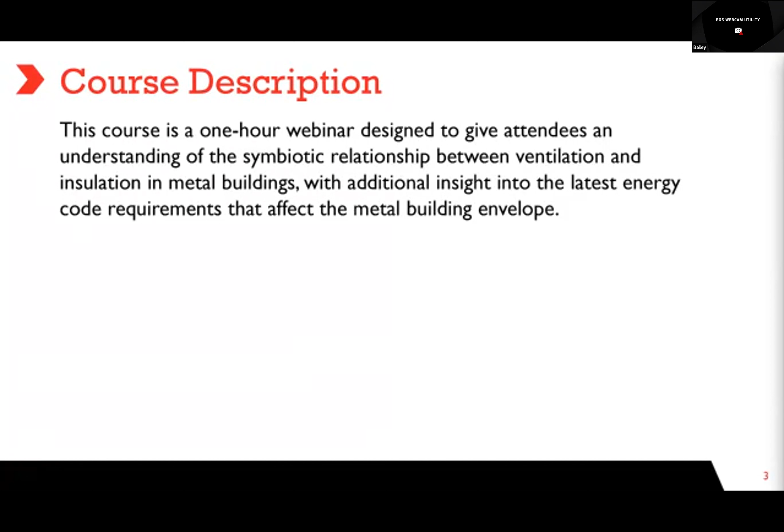This is going to be a one-hour webinar to give you guys a better understanding of the symbiotic relationship between ventilation and insulation for metal buildings. We're also going to incorporate some additional insight into the latest energy code requirements that affect the metal building envelope. So with that, we're going to go through the objectives that we want to cover today.

So we're going to talk about the science behind hygrothermal dynamics, and I'm really going to dumb this down. I'm going to make it very understandable to everyone: how it affects the building's longevity, calculating air exchanges, the factors to consider, and what to take into account when you're ordering. Ventilation helps a metal building's insulation performance. How does that affect it? And a history of the commercial energy code landscape, including the major governing councils that mandate today's codes. That's going to be a big topic Bill's covering.

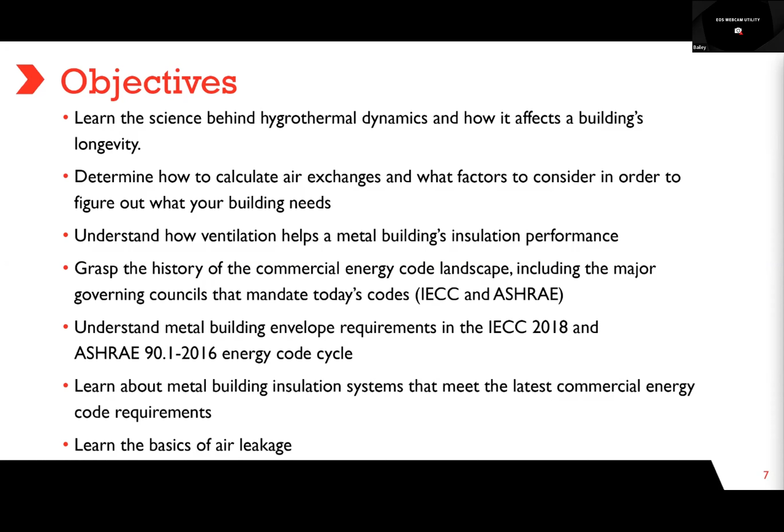And then understanding metal building envelope requirements for the IECC 2018 Energy Code cycle. So lastly, the metal building insulation systems that meet the latest commercial energy code requirements, and then we're going to cover the basics of air leakage of the building envelope.

So the question that is the impetus of this presentation is, why is ventilation an afterthought? Well, after reviewing the data and the results of a MBCA sub-meeting, we basically noticed a spike or increase of insurance claims with insulated buildings in regards to condensation damage with water vapor damage through the building envelope.

So in conjunction with that, we also noticed that there's a significant drop in building airflow designs and applications. And we arrived at the discovery that it appears that people within the industry think that you either ventilate a building or insulate, not both. And today I'm here to prove to you that both of those elements work together in tandem, a symbiotic relationship, right? That help with the building's longevity and the performance of it. So you're going to get the most bang for your buck incorporating these two systems together, okay?

So moving in, before we get into the meat and potatoes of this presentation, we're going to cover some basics, some fundamentals, so you have a baseline to get the rest of the presentation. First thing we're going to cover is hygrothermal dynamics. That's the big science of it.

All right, what is it? Relating to a combination of moisture and heat. Really simple. Hygro refers to water and thermal refers to heat. You can't manage a building's heat without also managing the moisture, okay? So if you increase the amount of insulation in a wall, you may also increase the risk of moisture and mold problems due to the dew point temperature within the cavity.

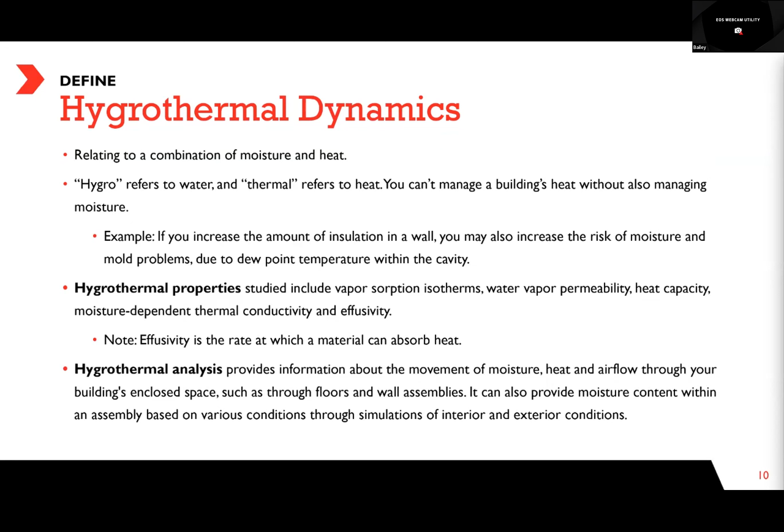The analysis side of it is the information about the movement of moisture. So heat and airflow through your building's enclosed space, such as through the floors, the walls, assemblies, the building envelope, can provide moisture content within an assembly based on various conditions through simulations of interior and exterior conditions. Okay, so that's your baseline for understanding hygrothermal dynamics, but we'll get into a little bit better understanding as we go forward.

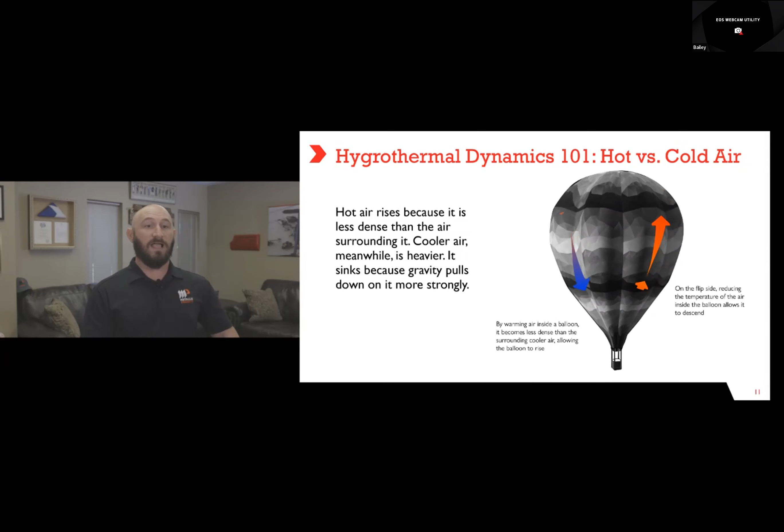So if I asked 10 people how does a hot air balloon work, I think 2 would get it right. So if you know coming into this presentation that hot air rises, you probably could get a job at SpaceX. Pat yourself on the back, all right? So let's cover some 101 here.

Hot air rises because it's less dense than the air surrounding it. Cooler air, meanwhile, is heavier. It sinks because gravity pulls down on it more strongly. By warming the air inside the balloon, it becomes less dense than the surrounding cooler air, allowing the balloon to rise, okay? That's the force that's pushing it up. On the flip side, reducing the temperature of the air inside the balloon allows it to descend. So we get that kind of basic concept of the science of hot and cold air, right?

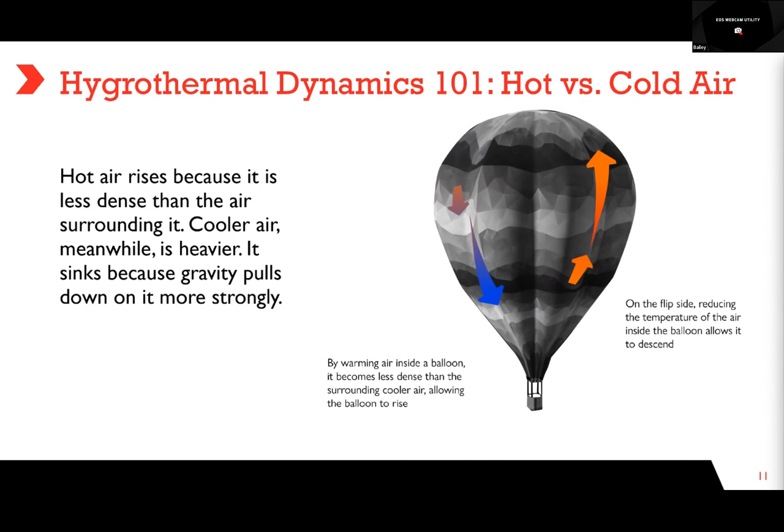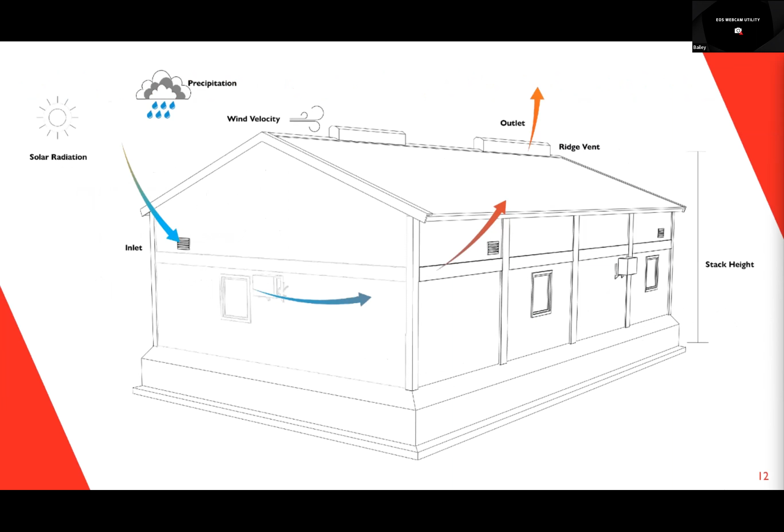So that's going to be the next part that flows into how does that principle work within a metal building. On this slide here, the intake element is a little bit too high up on the building. The lower the cooler air comes in, the better. Cool air will come in through the intakes of a building, whatever format that is, and will push the hot air up and out of the building.

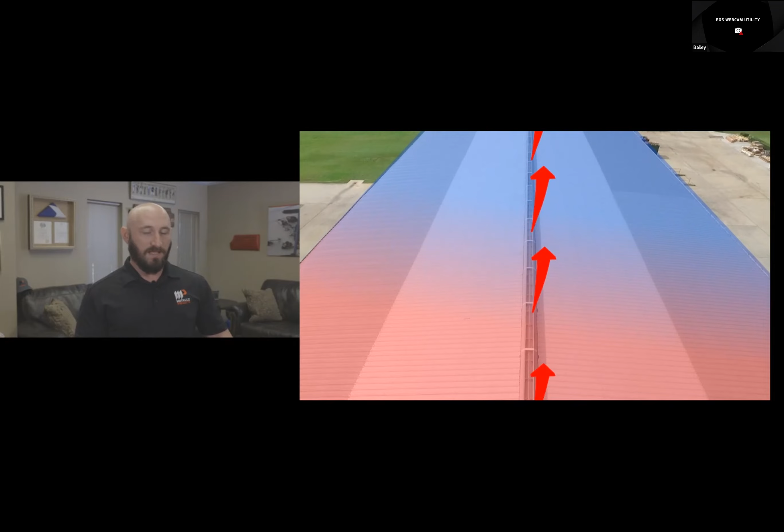Basically, that's airflow in itself. That's helping your building breathe. As you see right here, this is the hot air escaping the ridge line of the building. Cool air comes in through the bottom of the building, forcing the hot air up and out.

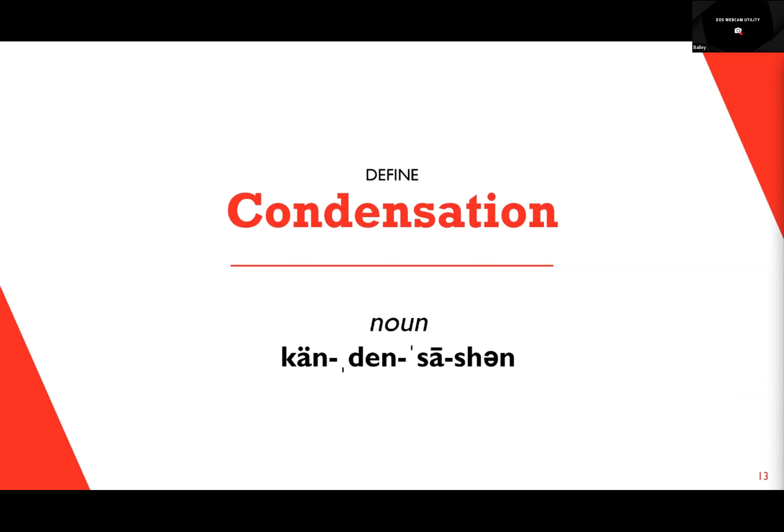So the problem here, condensation. How do we thwart that? How do we combat it? Let's talk about what it is first, okay? Again, we're working off basics. Next. So it's a change in the state of water from a gas or vapor form. We all learned this in 3rd grade science, right? Into a liquid form. Generally, it happens when vapor in warm air encounters a cool surface.

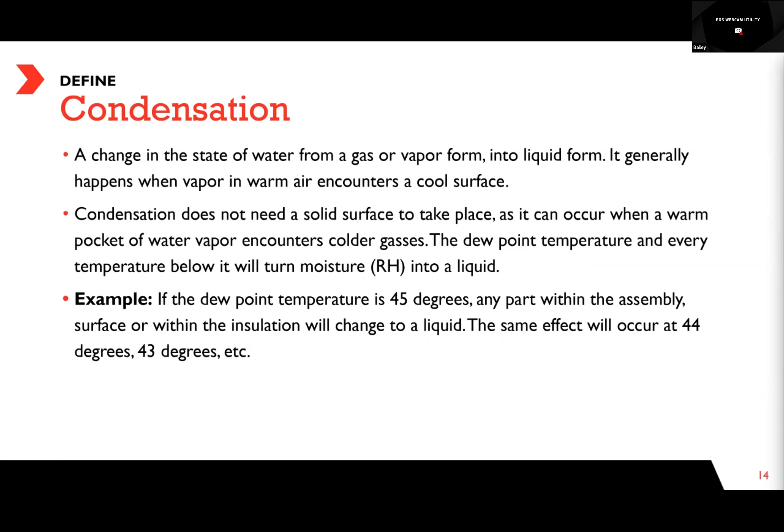Condensation does not need a solid surface to take place. It can occur when a warm pocket of water vapor encounters colder gases. So the dew point temperature and every temperature below it will turn moisture, which is your RH value, into a liquid. So for example here, the dew point temperature is 45 degrees. Any part within the assembly surface or within the insulation will change to a liquid. The same effect will occur at 44 degrees, 43 degrees, and so on.

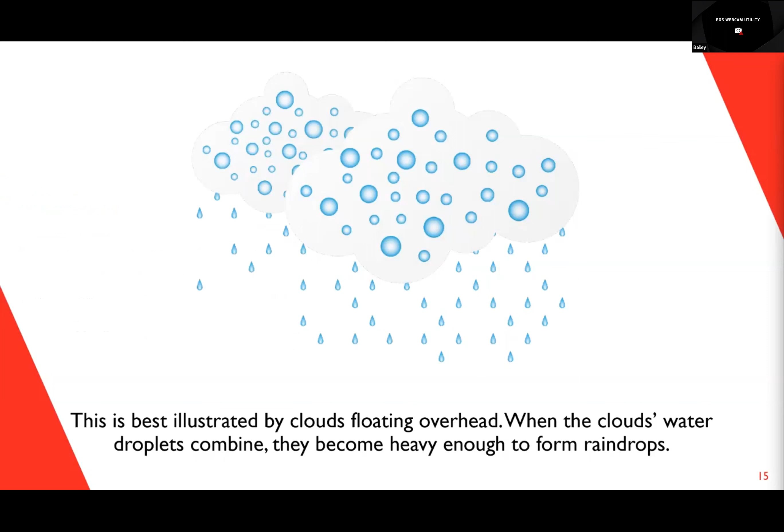So just like you see outside when you see clouds, that's one extreme meeting the other, and the result is condensation and/or the cloud, okay? And when enough of it happens, that's how the water droplets form, and then you got rain. I know I'm keeping this very basic and fundamental, but it's going to help you get a baseline to retain all this higher end knowledge here. So now let's talk about how the relationship between ventilation and insulation is in fact symbiotic, that it works in tandem. Next.

So in the past, the science associated with insulation and ventilation wasn't very well understood. As the amount of insulation increased, ventilation needs also need to increase. Insulation and ventilation are in balance. The relatively warm, moist air dissipates outside the building through the vents, but that's an important element there that I just glossed over. We'll touch on that again. They have to be within balance of each other. If the balance favors insulation, however, warm, moist air becomes cooler as it nears the roof, and then it can't easily escape if there's no exhaust element.

The air accumulates on the coldest surface, which is typically going to be your insulation, allowing mold to form, and if it's contaminated, the spaces provide a food source for other things you don't want in the building, like harmful bacteria, etc. Not only is this a potential health concern for people, but it also causes wood rot and degrades the insulation of the building.

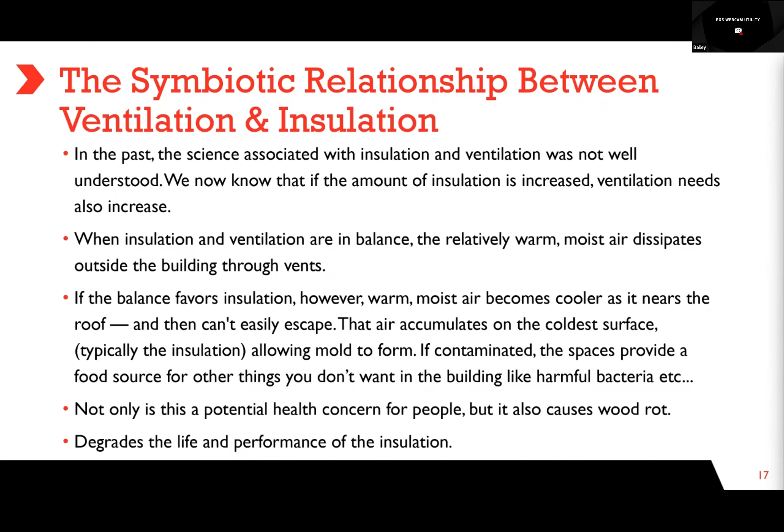Okay, so how do we make this happen? How do we fix this problem? What has to happen in order to mitigate this as much as possible, maybe it can't be eliminated, it's going to be through temperature regulation, right? So you don't have those two extremes meeting each other and creating the condensation problem. No matter how astonishing a building looks, it's a waste if the inside is uninhabitable.

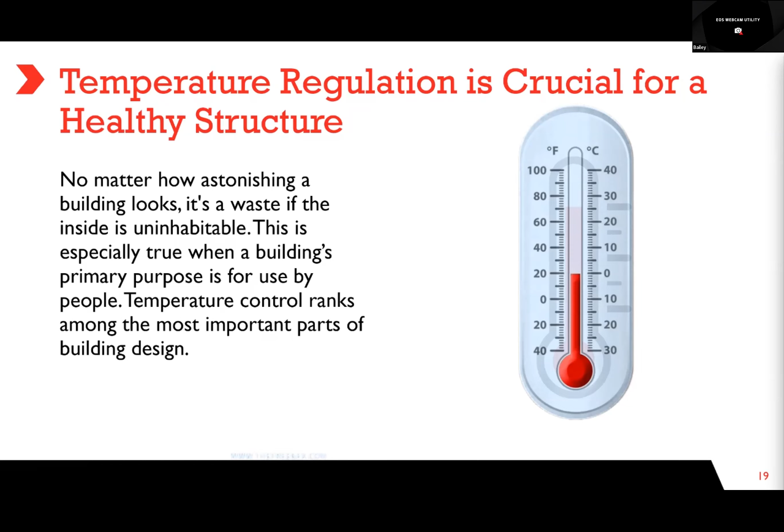So some of the pros of temperature regulation is especially true when the building's primary purpose is used for people. If there's manufacturing inside this building or it's a warehouse, temperature control ranks among the most important parts of a building design. It needs to be taken into account. Okay. So some things that you can expect: people working in uncomfortable hot and cold environments often behave in an unsafe manner, their ability to make decisions is compromised, and they perform manual tasks to a lesser degree.

Expansion of building materials. This leads to misaligned joints during construction, usually with interiors. Some materials are affected more than others, and we'll go into that more here at the end of the slide. For the safety concern, heat causes workers to be less careful. Oftentimes they will wear less protective PPE and become drowsy due to heat fatigue, and that's when accidents can occur. Okay, so the temperature of a building is actually closely related to safety.

And then about the materials, how that happens is when the temperature of steel structure rises, the atoms will vibrate. This process is called thermal agitation. That leads to an increase of interatomic distances and causes an expansion. So be thinking about screws in paneling right here. The constant expanding and contracting is going to affect the tensile strength. Go back to that one slide. The tensile strength and the yield strength and the modules of elasticity will decrease with increasing temperature.

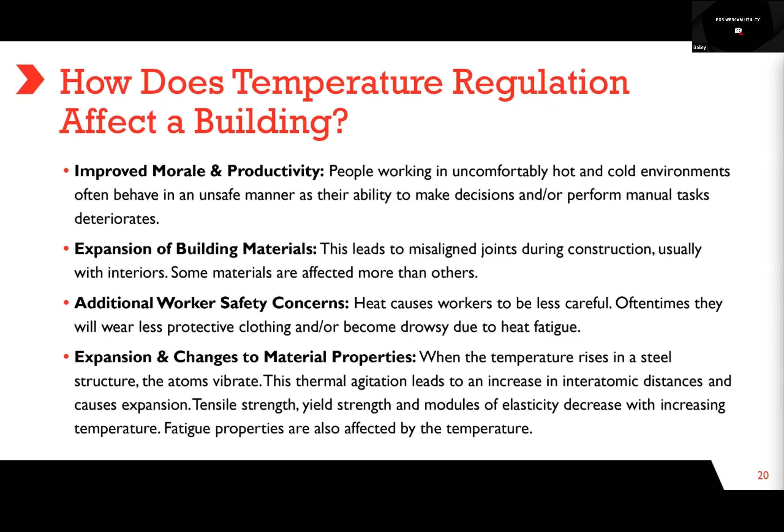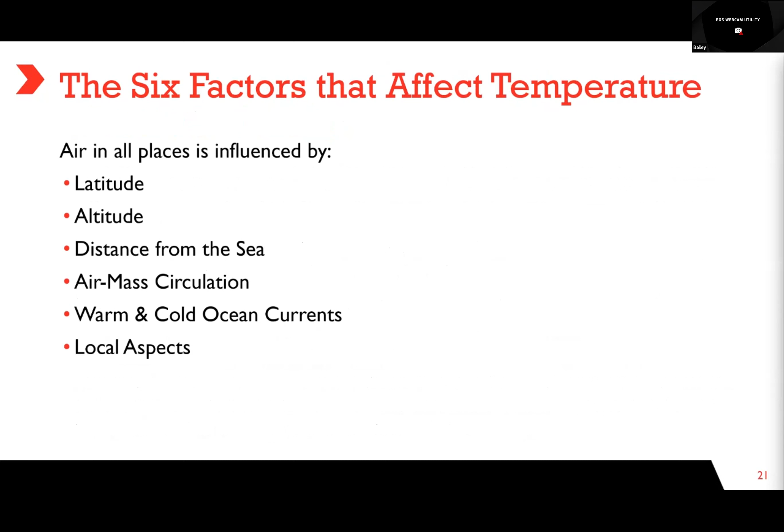So fatigue properties are also affected by the temperature, and that could come down to the color of the panels on the outside of the building. Next. So a couple factors here that you want to take into account that affect temperature are going to be your latitude, your altitude, your distance from the sea, your air mass circulation, warm and cold ocean currents, and then proprietary local aspects of the building site itself.

Okay. So some key things that you can use to help your building breathe, or ideas, is whenever you're designing or evaluating a pre-existing building, you want to have a climate responsive architecture. So you can do a site analysis, and there's lots of companies out there that do that. The layout of the building on the site and which end of the building is facing the sun,

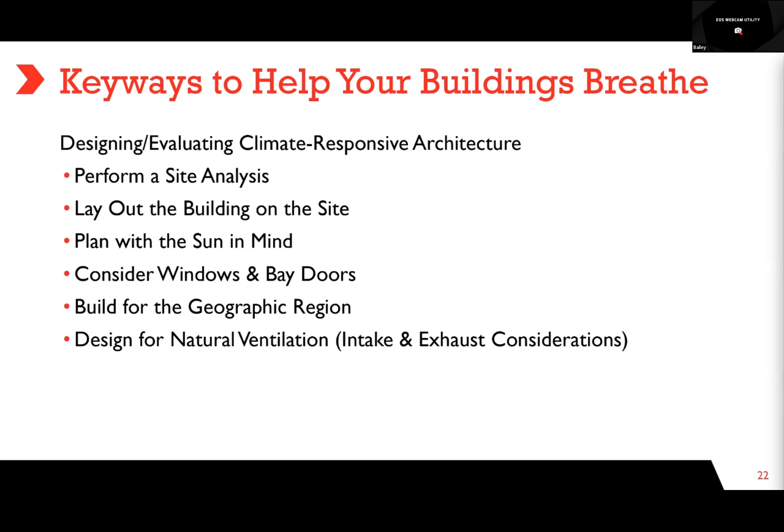you need to consider windows and bay doors, things that let heat in and airflow if they're open or not. That'll change the equation. Build for a geographical region. Are you in the mountains? Are you by the ocean? Are you in a mostly desert climate? And obviously designing for natural ventilation is comprised of two elements, which is your intake and exhaust. You obviously have to have both, and they need to be balanced between the two of them.

Okay. So now we're going to get into a little bit of the technical side of this, but I made it really simple. In order to get that temperature regulation that we talked about, we now need to get into airflow exchanges, next slide, and how they're going to be calculated. Now let me start by saying, I'm going to take some time on this slide. This is a little bit of an art and science to solve this problem. How we do that is it's first going to simply start with a conversation.

And the first question we need to ask is what level of air quality is needed and or desired? And this can be done prior to the inception of designing a building or after you already have a building and ventilation wasn't taken into account and you want to assess what you currently have to determine what you need to buy or what you need to change in order to get the end result that you want. This math and this process can be done both ways.

So once you figured out the air quality that you need, and that's going to be proprietary to what you're doing inside the building. Are you drying tobacco leaves? Is it a manufacturing site? Are you producing liquid chlorine? Things like that. All those things are going to be factors that come into play here when you're deciding what the ACH needs to be, which is your air changes per hour.

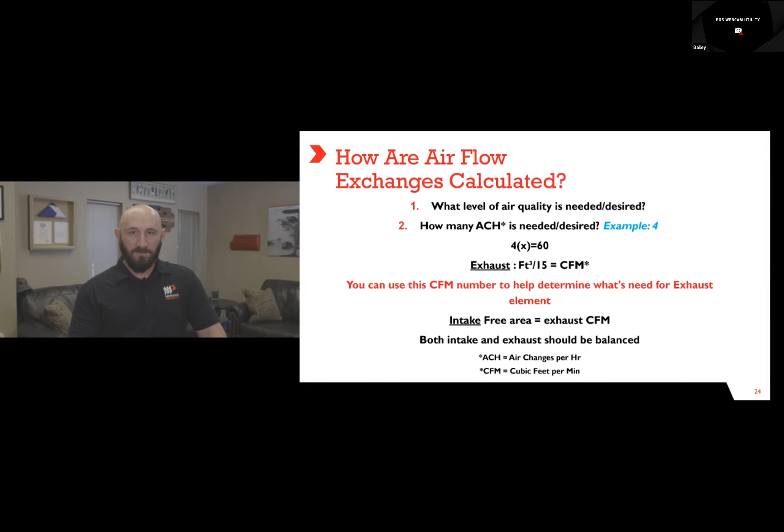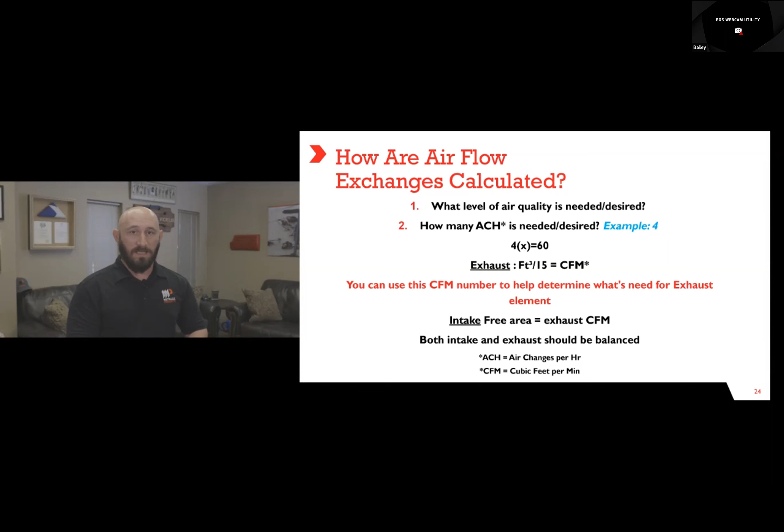So the intake free area, which is going to need to be at the bottom, at the base of the building, because that's where all the cool air is that's coming in. You take the intake free area, which basically assumes that you've deducted all of the obstructions. So if you have an opening with blades that open and close, you would have to subtract that obstruction in order to get the proper intake free area. That needs to basically equal and balance the exhaust CFM that you have for that building. So both intake and exhaust should be balanced.

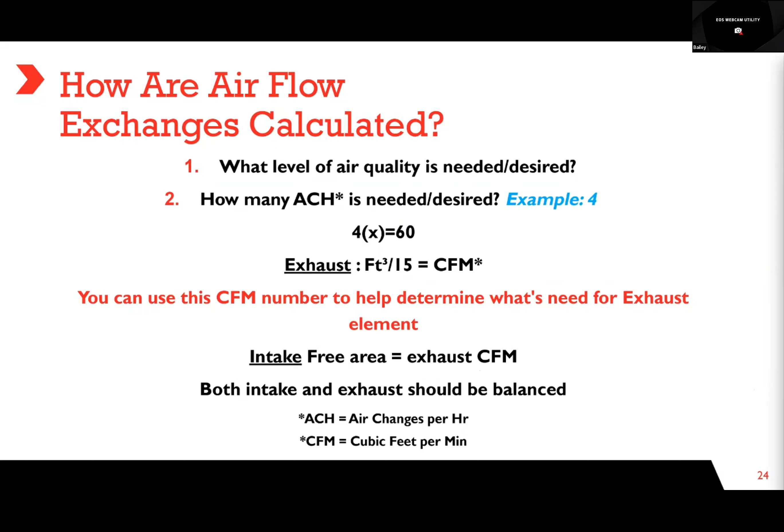Here's what happens if it's not. If you have too much intake and not enough exhaust, you're not going to get the ACH that you want. The building breathing won't be optimized, okay? And you basically are, in a sense, wasting money there. If you have the inverse of that, where you have more exhaust than you do intake, and those CFMs don't match, you're going to create a negative pressure element, okay? And that's what you don't want. That's 99% of the problems that we hear about, in regards to negative pressure. And you can't see it, and that's why it's hard to understand it.

So let me speak to negative pressure a little bit. It's a condition where air pressure is lower in one place in comparison to another. It can introduce contaminated air and air with high relative humidity in some climate zones. So for example, if you close part of the exhaust system on a 300-foot building on one side and it's open on the other side, that negative pressure element will create a cyclone effect, and you're not going to get the ACH that you want, and it will actually bring weather into the building. That's when people think that their exhaust elements are leaking, when really they're not. They're pulling rain into the building because they've ignored this principle of negative pressure.

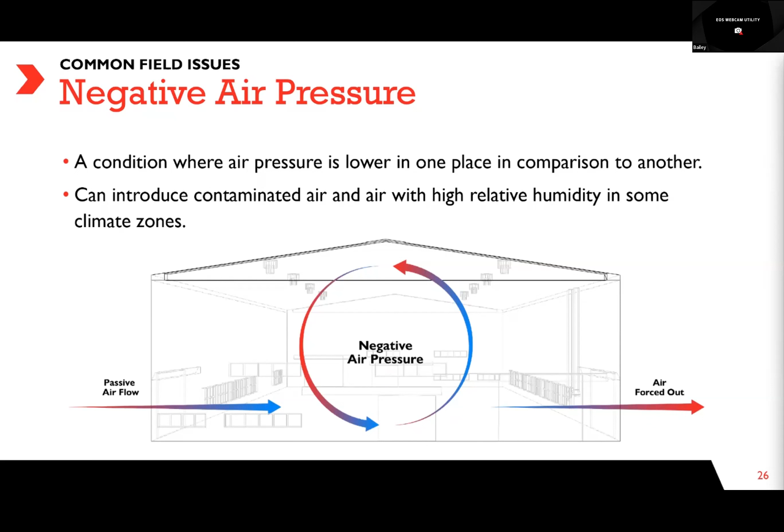So how you can thwart that is, make sure that the exhaust and intake CFM elements are balanced with each other. Okay, if they're operating as designed and the exhaust elements are doing what they're supposed to be doing, it's not going to allow leaves, rain, snow to come in through your exhaust element, because it's going to be venting. Okay, it's going to have to combat that, and it'll beat it out.

All right, next. So another thing that we see, these are just common misunderstandings and common field issues, is conflicting air management systems. And how this happens is, people that didn't get this webinar don't understand the principles of negative pressure, hygrothermodynamics, how air works within the building itself, and how a building's supposed to properly breathe, right?

So what we've seen in the past is huge fans right below the ridge line that are basically forcing air down to cool off workers. Well, if it's forcing air down, where's that air coming from? It's coming from the top of the ridge. And if you have an exhaust element above that, it's going to pull air through those vents, and that's why you're going to experience water coming in if it's raining. So ignoring these principles and not adjusting things or setting it up properly will cause problems with your building.

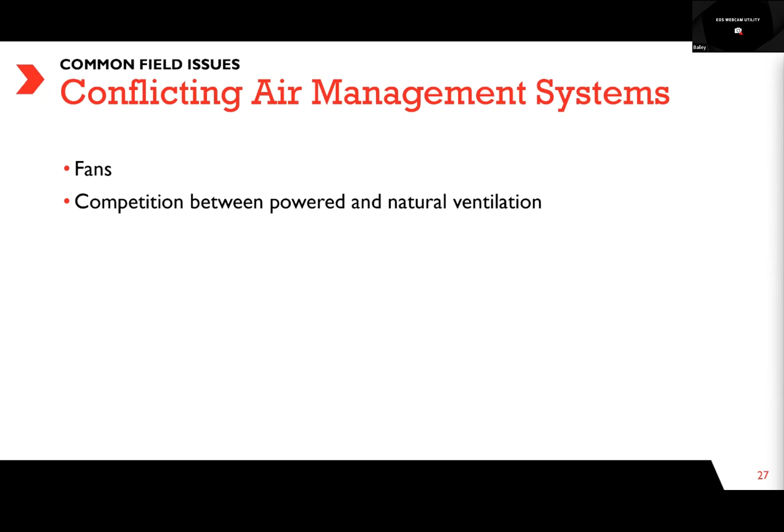Now, if you also have purge fans, exhaust fans that are pulling air that's inside the building and forcing it out, and you don't have enough intake to support that, that'll also cause you some problems. I don't know if some of you have gone to a job site where there's a completed building and you literally can't get the door open because it's being sucked in. You have to put your foot up on the frame just to open the door. That's negative pressure. That's the element that's going to be in place when you see that.

So those are things that I wanted to bring to you guys to have a greater level of understanding of the science of airflow within a building and what affects it, and how this airflow can help regulate the temperature within a building so that your insulation is not compromised. It maintains its integrity, it has a longer life, and it's not going to get damaged. So with that, we're going to be moving on to more insulation considerations for metal buildings. We have Beals with Therm-All.

For people that don't know me, Bill Beals with Therm-All. Been doing a lot of code presentations over the years as they've evolved, specifically for our industry, which is metal buildings. And a lot of this is kind of repeat stuff because some things in the code change every 3 years, some don't. So I'm going to kind of get us through the process of how this all works. A lot of people know ASHRAE as a standard, which is exactly what it is. It's the minimum standard of energy efficiency that's done in a 3-year cycle, just like the IECC.

IECC is the energy code portion of the ICC, which is the International Code Council that has plumbing, fire, mechanicals, etc. So we focused more on the IECC and the ASHRAE 90.1 standard as far as envelopes go in our industry. The 3-year lag is between both of them, but ASHRAE typically will publish first, and IECC will do a publication, which is actually the code. And a lot of the reference data comes from ASHRAE, specifically to metal buildings, because the thermal performances and U values that we'll get into all come from submittal data that was done at ASHRAE. So there actually is a reference from IECC in part to the assemblies and the performance testings.

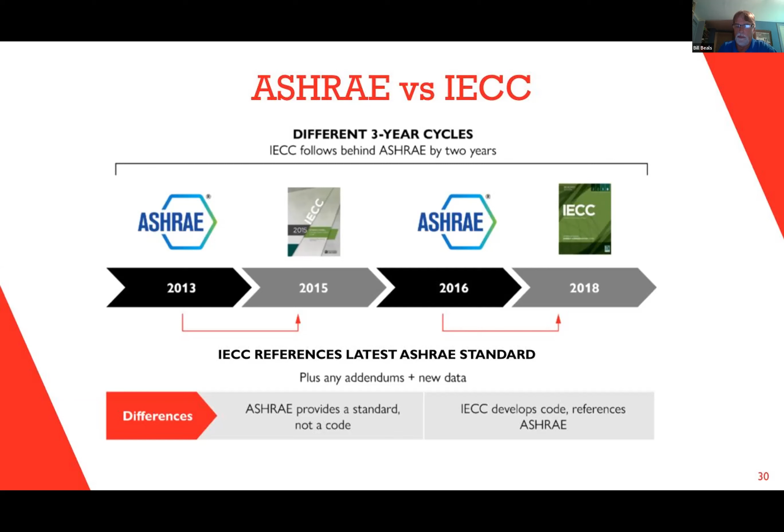So again, ASHRAE typically is not a code, it's just a minimum standard of energy efficiency. However, some states do adopt the ASHRAE standard as their energy code, which is perfectly fine, but IECC is more of a publication that has the written language around a code more than just a standard and all the methodologies that are published in ASHRAE and how the programs actually work.

So there's a couple of ways: the prescriptive approach, which is just that. We call it the cookbook approach, which all IECC codes and all ASHRAE standards have a table, and they'll publish U values for metal building roof, metal building walls, and all your fenestration. So it's pretty easy to just look at the table and say, I need to meet this, this, and this. And that's a prescriptive approach. And a lot of people think that's what they have to do, but you can actually do 3 choices. There's trade-off method, which is usually achieved through ComCheck. And there's whole building modeling, which is more of an open studio program that takes into account the whole building as it relates to its climate zone. So we mostly do the trade-off through ComCheck.

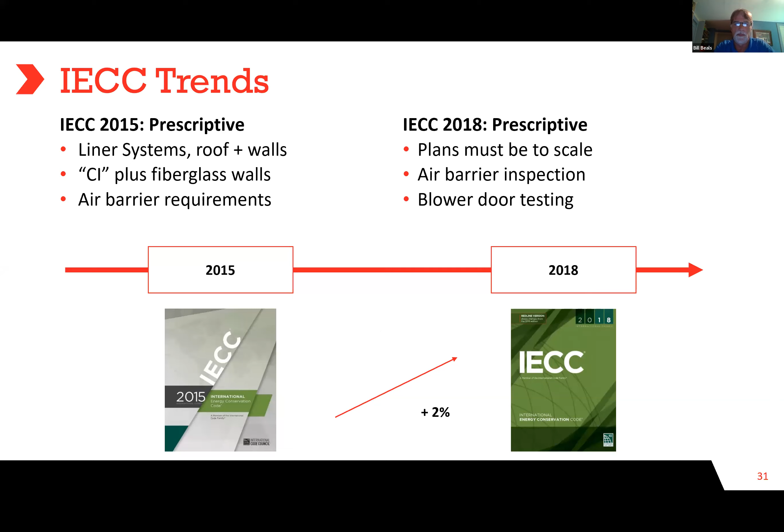So how ASHRAE is influenced through our industry is the Metal Building Manufacturers Association, and I'll say this now while it's there. Sam alluded to hygrothermal analysis. We actually have done quite a bit of that through the MBMA, and if it's not published yet, it soon will be. And it's a simulation: indoor temperature, relative humidity, outdoor temperatures, relative humidities, the fiberglass and board insulation assemblies, and the vapor barrier perm rating, and how the moisture in certain times of year through that simulation will migrate in and out of the cavities. And right now we're, I believe, on our final 0.02 perm, and what the relationship of moisture is in these cavities based on that.

And that comes into play in a part of the code called the weather resistive barriers, which is a part of the IBC. It's not the energy side, but I run into it quite a bit. And you have to have a weather resistive barrier to stop moisture from migrating into the cavity. And there's no exemption for metal building walls. The only exemption is, I believe it's an ASTM E331, which the metal building manufacturers can do with their panel. But it's a sealed panel and it is tested, and most pass, but you have to use all of what was tested under that E331 in that wall to be in compliance. The only other option, an exception to the rule, is hygrothermal analysis, which would prove that that moisture in that wall cavity will be introduced and mitigate itself out under normal conditions.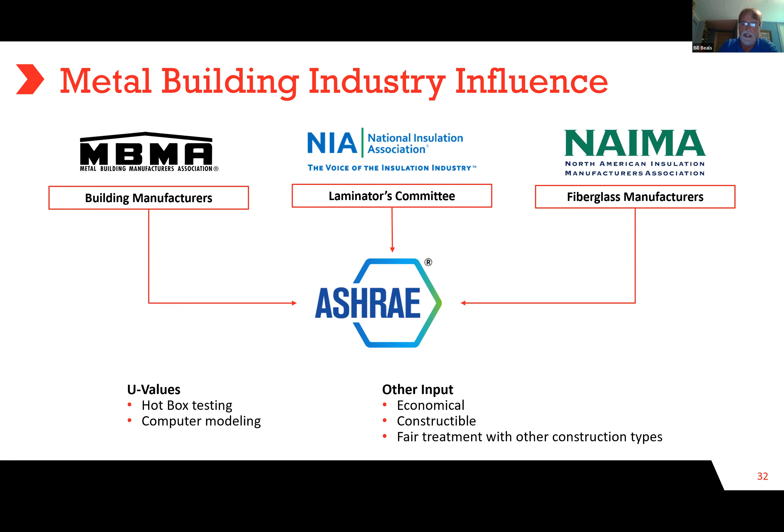But in our industry, specific to metal buildings, these are the 3 ways we do it: the hot box testing, computer modeling, and is it constructible, fair treatment with other construction types. So it's pretty basic in what we do. And then, believe it or not, people think insulation, they think R value, but really a U value is more important than an R value. It's the actual performance of an assembly over the performance of a material.

So when you build a building and you put R19 in the roof and you squish it, it comes down to the old U value of 0.065. That's a tested in place R of 15.4. That's actually gone down over time. So as an owner or as a mechanical designer, and as ventilation goes, you really want to know the overall performance of that assembly. So that's why U value of a roof and U value of a wall is the real performance that you need to pay attention to.

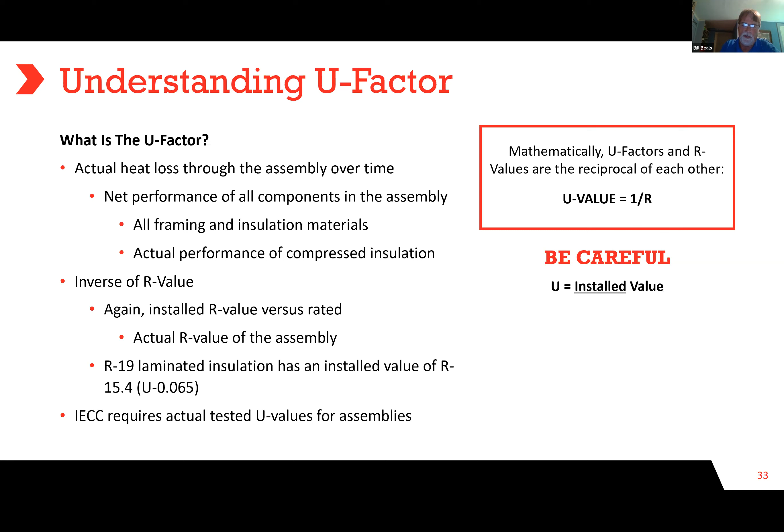And I got some tables coming up. The R value method and the U value methods are two separate tables, but they're kind of the same thing, and I'll talk about that in a minute. So there's other parts of the code and the ASHRAE standards that come into play. The alternate materials approach paragraph has expanded quite a bit beyond what it used to be. What this means is you have all kinds of buildings, fabric buildings, construction types that are not part of the code itself.

You have brick and mortar, all your construction types that have been around for 100 years, but there's always other types of construction where you basically have no test data to say that the envelope meets the code. So it's more what I call intent: you take that construction type, design it with insulation and materials, and submit it to the code official as meeting the intent, but there's no U value testing to show that.

And that code official either accepts that or he has to write a letter stating the reason why the alternative is not approved. I've yet to see one not approved, but I do run into these types of constructions. That paragraph used to be just one sentence saying you're meeting the intent of the code by doing this, so it's got a little more language there. The other is the U factor alternative. Every IECC code has had it and the ASHRAE standard has it.

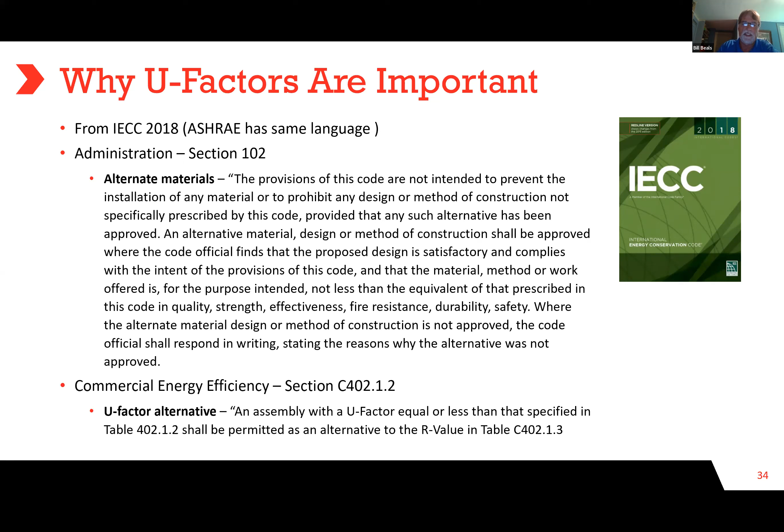The simplest example I can use is a metal building wall under most IECC codes, say R13 fiberglass with R13 CI, continuous insulation. That combination, under the prescriptive path, was thought to be the only way to meet the code. And it's not. There's a U factor alternative, which says if you have a system tested per ASTM C1363 hot box or simulated through thermal analysis based on hot box testing, and you can back up the data that your U value is equal to or better than that prescribed in the R value table, then you're allowed to use that. But you have to have the test data to show compliance with the U value.

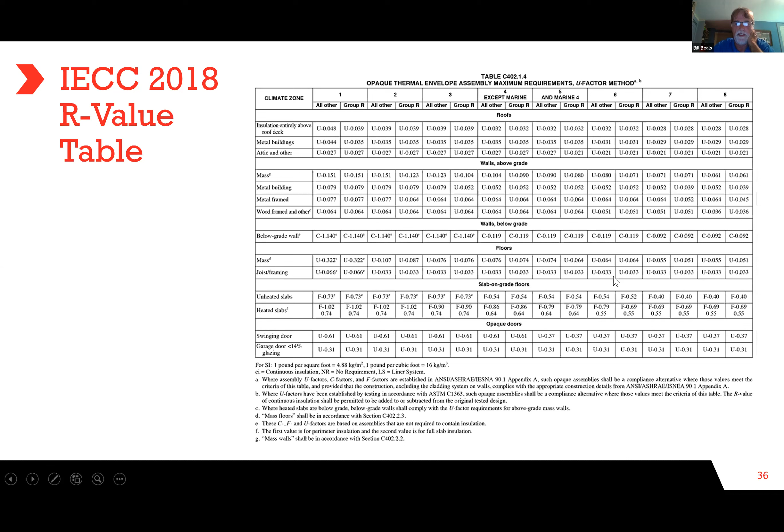So there's lots of things in the code that I've read for many, many years and try to get better understandings on. And this is one of the ones where a lot of architects just don't seem to understand what these methods are and why we're allowed to use them, but they're there.

So heat and ventilation and IECC. So I'll start with heat. As far as IECC goes, you have an option under the IECC actually to use the ASHRAE standard as a compliance path, as opposed to the IECC code. And it's, I believe, C401.2, which is called applications. And it said these commercial buildings shall meet one of the following. And the first choice is the ASHRAE standard.

So as a designer, if you say, all right, I'm going out of IECC and I'm going to use the ASHRAE standard, you have to use the ASHRAE standard two years prior in publication. So I-18 code, any state using I-18, you'd have to use the ASHRAE 2016 standard as a compliance path as opposed to I-18. And there's a few reasons for that. There's a lot more calculation procedures that are outlined in Appendix A in ASHRAE specifically for metal buildings.

And there's also what we call semi-heated space. So IECC does not have a semi-heated space specifically. They have low energy buildings, which is on the very low end of semi-heated space. And the heating requirements are below 3.4 BTUs per hour, and then there's a lighting requirement. So if you're under that in IECC, you're actually exempt. But ASHRAE has what's called semi-heated space.

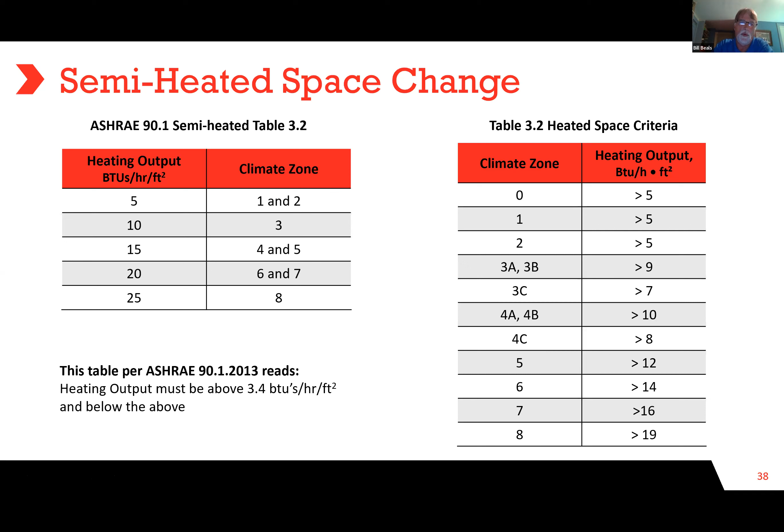And it does affect the northern climates, I would say, the most, because I'm in Maine and a lot of ours are climate zones 4, 5, somewhat 6. When you go to this semi-heated space, or if you try to build a building heated to that and you have a wet sprinkler system, it's more than likely going to freeze. Whereas the old BTU numbers were just at the point where you could actually get away with semi-heated space.

So air barriers, I got some slides that we jump around on here, but make no mistake, as the codes have evolved, the language within the air barrier requirements has expanded quite a bit, because thermally we're kind of maxed out for metal buildings. And I think most other construction types, when you look at the U-values and the systems of fiberglass, board, whatever you want to use, we've kind of maxed out where we are as far as envelope goes.

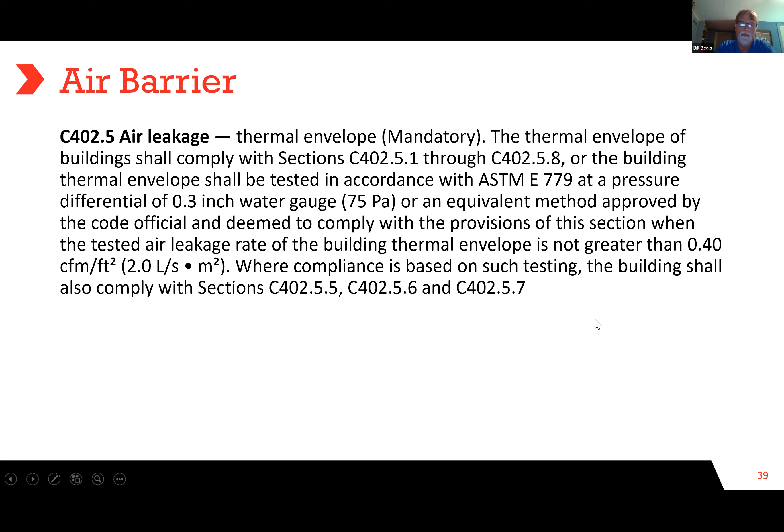So the next thing was the air leakage, and it becomes mandatory to have an air barrier within the thermal envelope. And in some cases, whole building testing is required as per ASTM E779, and you have certain allowable leakage rates. And I'll get into this a little bit more, but there's a lot more language than just the testing of a building, and there are other choices.

So the language used to be a couple of paragraphs. Now it's a continuous air barrier. The entire envelope shall be designed and constructed with a continuous air barrier. Exceptions are semi-heated spaces, which we talked about, and single-wythe concrete buildings in climate zone 2B, which for some reason has always been in there. Each component of the envelope has to be clearly identified or otherwise noted on the construction documents.

The joints, intersections, penetrations, and basically all components must be noted. Some states are a little different, but up in New England here, we have some pretty good code officials that look at all this. So when you go to submit your drawings for a building permit, your drawings typically have to show all of this, as you have to designate the air barrier and show on the drawings how all these different construction types interface. And whether you're blower door testing the building or not, these are still mandatory requirements.

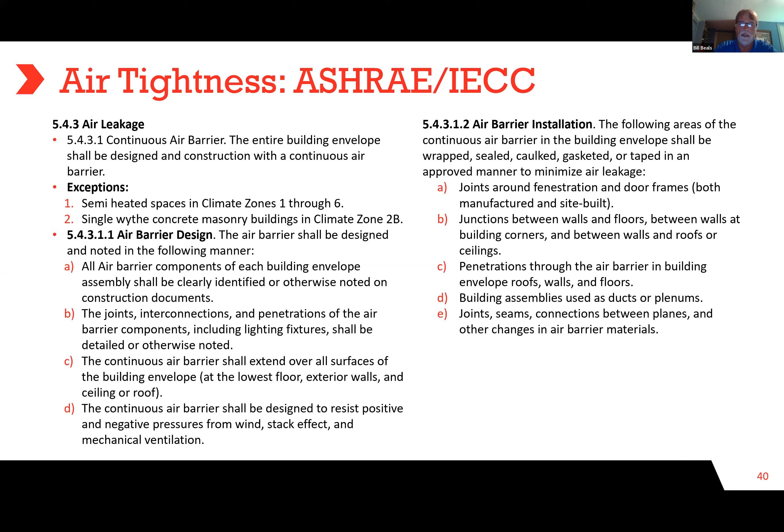And the ComCheck reports are another part of that as far as the energy side goes. So I will tell you that this air barrier thing is not going to go away, and it all will circle back to the ventilation part, which Sam talked about, because now that we've talked about the envelope and the insulation and the air tightness, the air quality within a building comes into question. It's like, how are these buildings going to breathe? We'll get to that when we get to those slides.

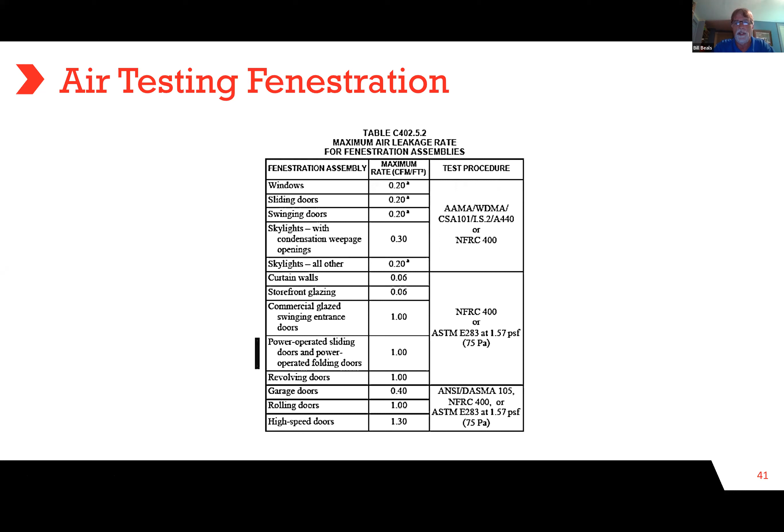When it comes to air barriers within a building, the designer has three choices. He can choose materials option, assemblies option, or whole building. And if you choose whole building, that means the whole building is going to be blower door tested. And if it fails, you can't go back. You own it until it passes. And there's certain numbers under ASHRAE that you're allowed to get. You don't have to be at the 0.4. If you make corrections and you only get to a certain number, you're actually in compliance.

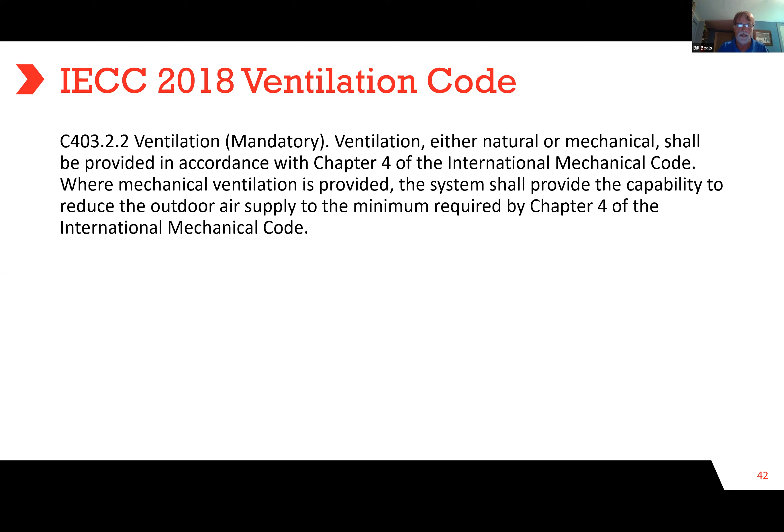So the other part of the code that is mandatory is called ventilation, and it's either natural or mechanical. I know Sam talked about natural as a big part of it, and in many climate zones, that's a great option. The mechanical side is a little more sophisticated. I'm not going to get into it other than to say Chapter 4 of the International Mechanical Code needs to be understood as you go into these buildings that are energy efficient, airtight, and we do not want moisture in the assemblies.

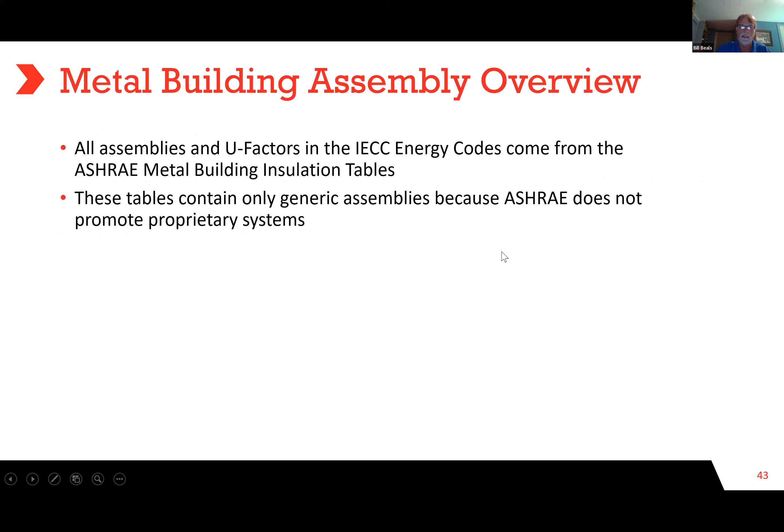These positive and negative pressures that Sam talked about play a huge role in the moisture content within these assemblies. It's not just moisture passing through the vapor barrier, it's a negative pressure pulling moist air from outside the building into the building, and that's usually contaminated moisture and can over time become a huge problem if not properly vented, changing the dynamic of how the moisture got in there.

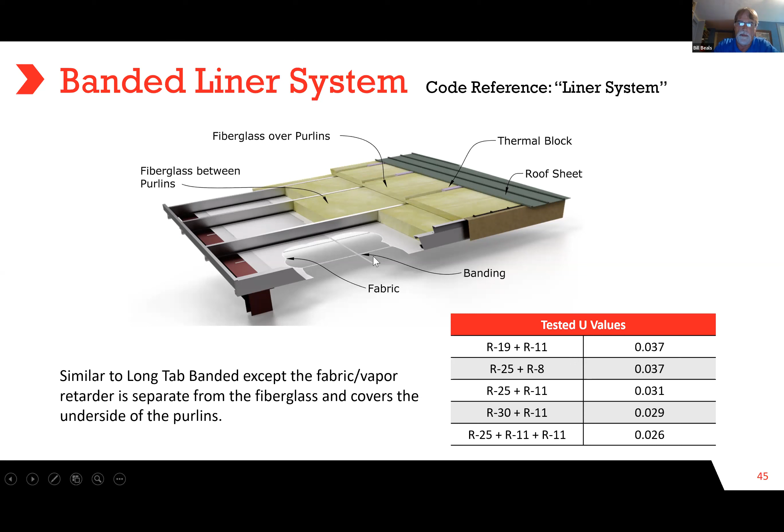So your thermal performance is less, because any type of moisture as a liquid becomes a conductor of heat. Now, these buildings do cycle in and out of some moisture content, as do all other construction types. But again, you look at air tightness, thermal U values, the performance of all these systems, you start running into: how do I make this building operate the best it can be? And that's with proper ventilation, zero pressures, no positive, no negative.

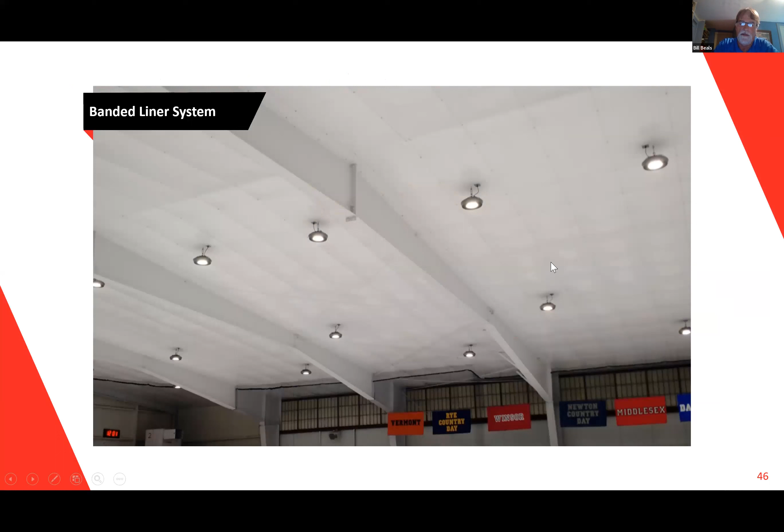These systems have been on the market quite a while. They perform and do a very good job in all construction types. This is an ice rink, and swimming pools, I'll tell you right now, could be a problem. But again, it comes back to what's this building going to be used for?

And I heard Sam mention a couple, and I like to say swimming pools, because if somebody calls, say, hey, I'm building a swimming pool, what should I do? It's like you're calling the wrong person, because I'm not going to tell you to use a liner system. I'm not going to tell you use anything, because I've seen so many failures. Granite cutting buildings, all these need to be addressed by the proper engineering company and architects that can design and vent these buildings to perform the way they're supposed to perform.

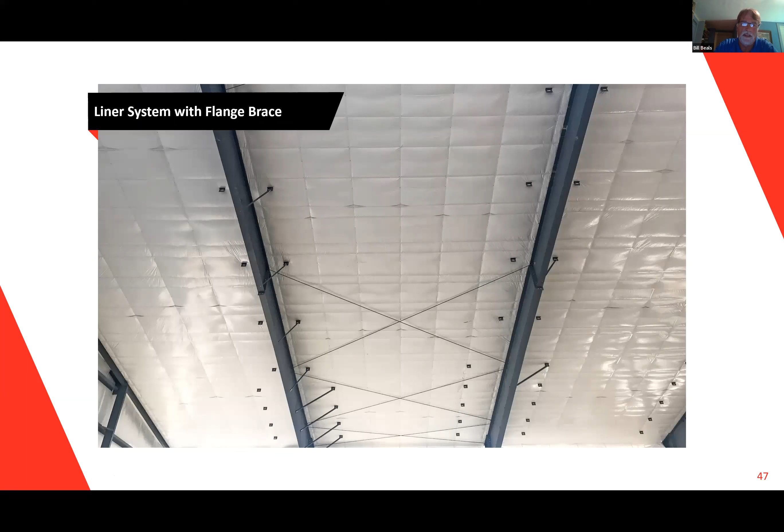We have a lot of interruptions, so to speak, in the vapor barrier when we cover the purlins and go to liner systems. This shows most metal building manufacturers have a great flange brace detail now, which is either a knife plate or a double L that minimizes the penetration in the vapor barriers, which need to be 100% intact for it to perform. I've got a slide coming up that'll show you the difference of a vapor barrier with a 1-inch hole and a vapor barrier with nothing other than diffusion, which is what happens when gas as a water vapor goes through a vapor barrier.

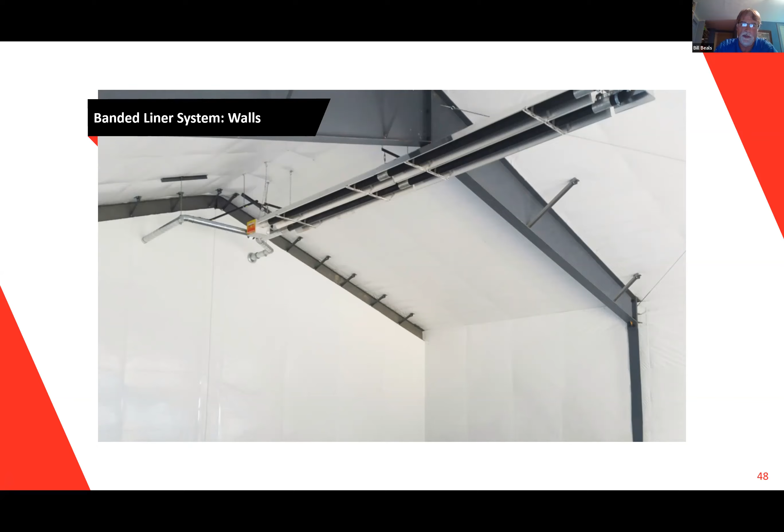The walls by code, this is a perfect example of where we are at with metal buildings and fiberglass. The roof is a liner system, the wall is a liner system. The heating systems, as long as they're vented, can perform quite well. Radiant heat is another one that we see a lot of, but I'll tell you this, if you got radiant heat, don't park your dump truck in there full of snow in the winter while it melts, because then you're going to call me and wonder why there's ice on your windows.

Air leakage and infiltration. So I'll get into that a little bit. Air leakage is sometimes called infiltration, which is the unintentional or accidental introduction of outside air. Humid climates will have warm, moist air moving into the building envelope through leakage around passage doors, and in the winters can result in moisture in the envelope. Infiltration is caused by wind, stack effect, and mechanical equipment. I've got some slides that will explain exactly what that all means.

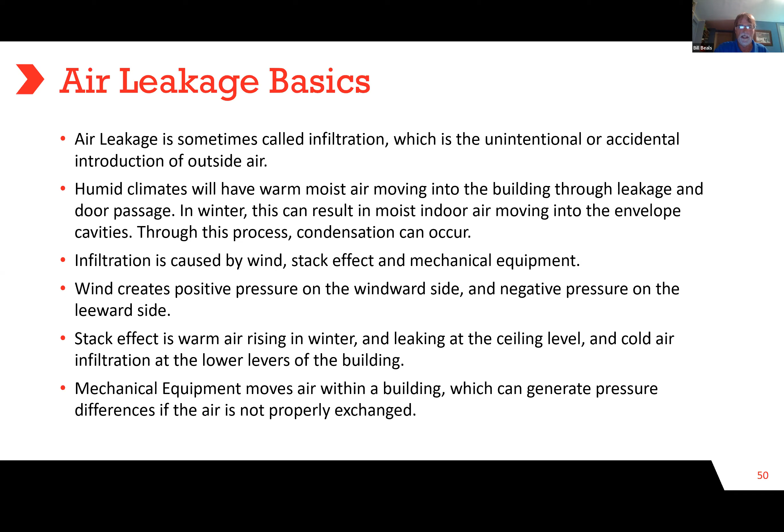Wind creates positive pressure on the windward side, negative pressure on the leeward side, and how that reacts to either pushing outside air in or sucking inside air out. And this is why air leakage is very important on how a building is going to perform sitting in an industrial park in a real world situation. So the mechanical equipment, it all moves air. So this is a real building. You'll have internal positive pressure acting in concert with external forces.

So when the wind goes up over a building, it creates what's called uplift. And it's suction pressure on the roof that lifts air within the cavity at some point out. So any moisture, sometimes it does get in your metal building envelope. There's some days it will exhaust itself just by the uplift pressure of the wind. But in the winter, all of your heat that you're trying to store, especially in Maine, you don't want that. So that's why this air barrier and air tightness has become a huge part of energy efficiency for all buildings.

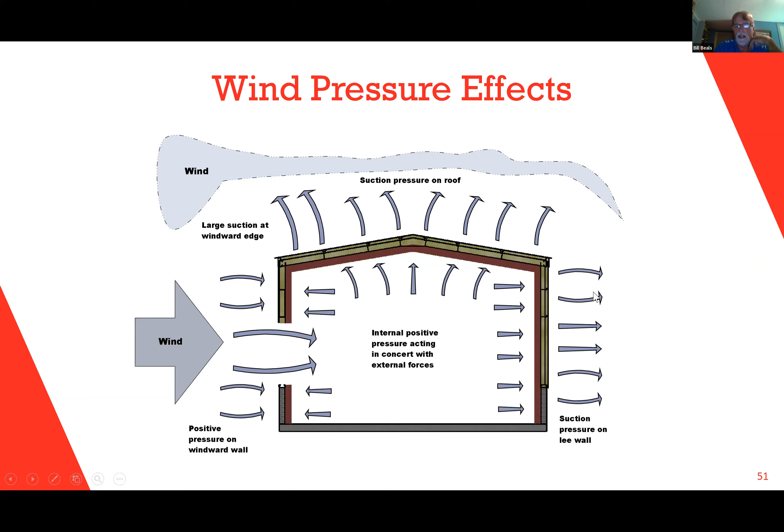And then we talked about the wind. On the windward side, positive pressure. The leeward side is going to have the negative pressure. So you look at a metal building wall, we have that fully insulated with fiberglass here. And the panels themselves, they're lapped, but they're typically not sealed. So it's just a lapped panel. And it will start pulling the heat out of that cavity that you've collected during the day, just based on how Mother Nature acts in a building that's in the real world.

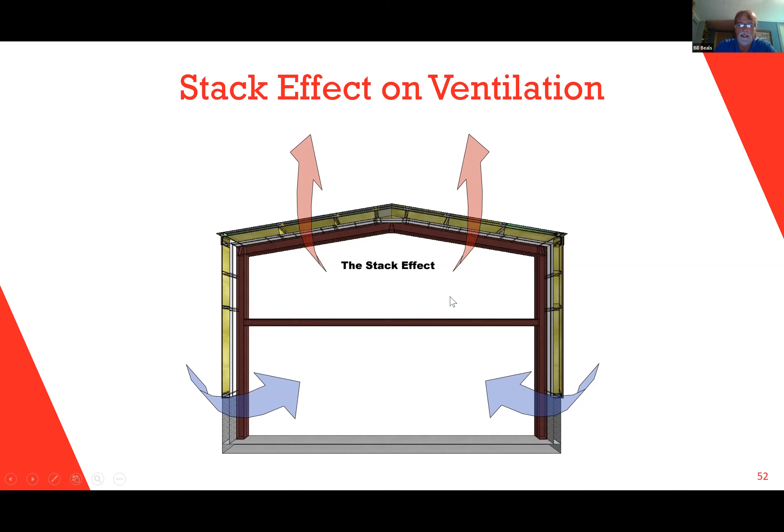Stack effect is pretty simple. Warm air in the winter rises, cold air is introduced typically through air leakage down around the bottom. So we take a new building built to code with an air barrier in there. We minimize that air that's coming in at the bottom, and then stack effect, again, what happens? You're going to start building a pressure cooker. So ventilation is everything on how these buildings need to and should operate.

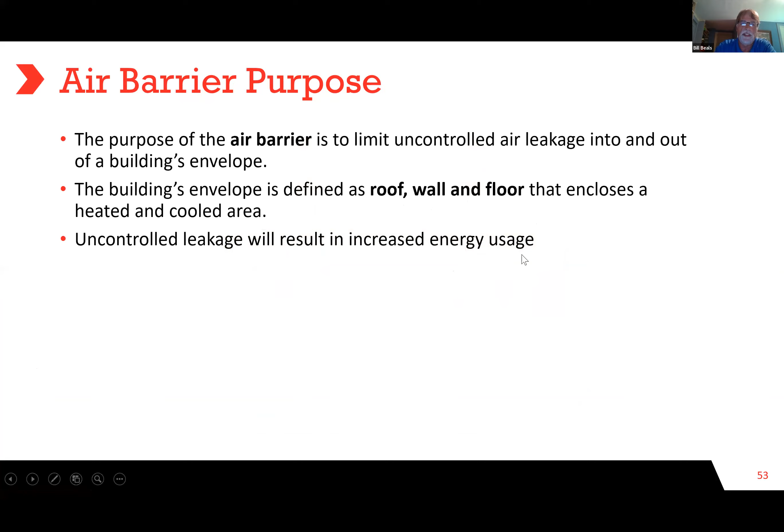All right, so we talked a lot about the air barrier and the purposes, and uncontrolled leakage will result in increased energy use, and it all has to do with devil's in the details. Everything has to be detailed out. So I've got some pictures here that show some air barrier that we do for submission for code officials, and this would be a perfect example of a liner system.

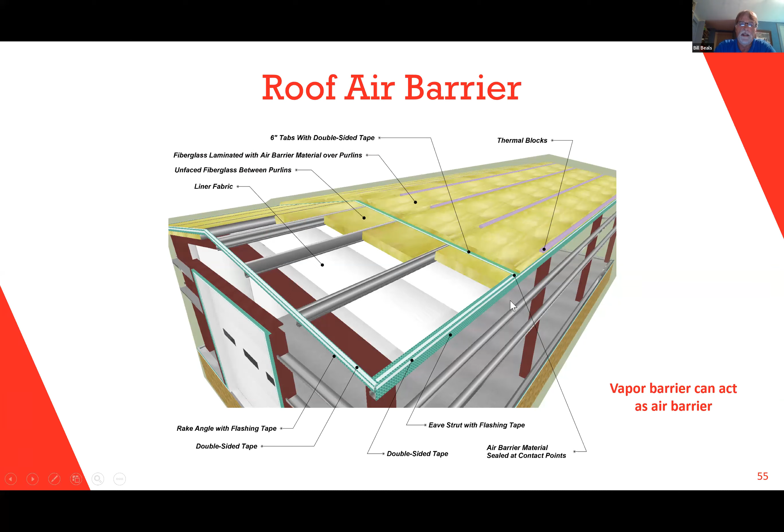The white vapor barrier can be used as the air barrier, and that would have to be detailed out and shown on the drawings. We have other options where we can put air barriers within the assembly, and that would have to be detailed out and done exactly how this is done. We also do all the walls the same way. Again, the air barrier would be detailed and shown. All your transitions, all your floor to wall would have to be done.

So technically, the way the code is written right now, this is what has to be submitted as a drawing for your air barrier design to meet the letter of the law. Whether or not you're going to blower door test it is irrelevant at this point, because it's still there and has to be done.

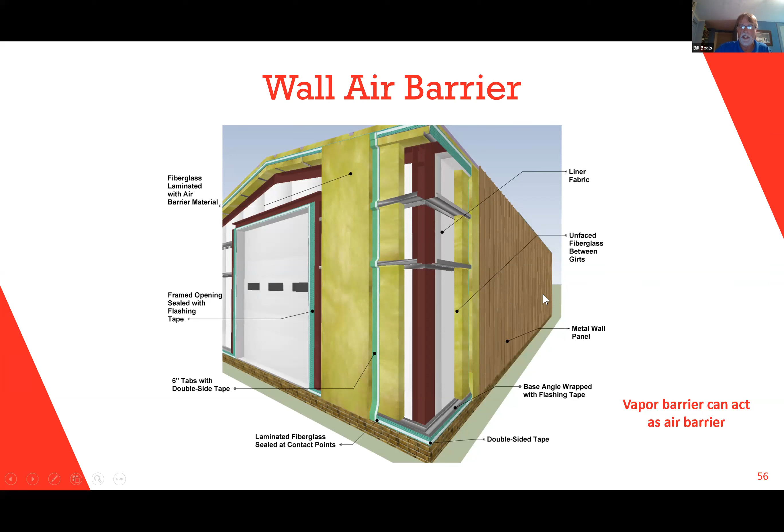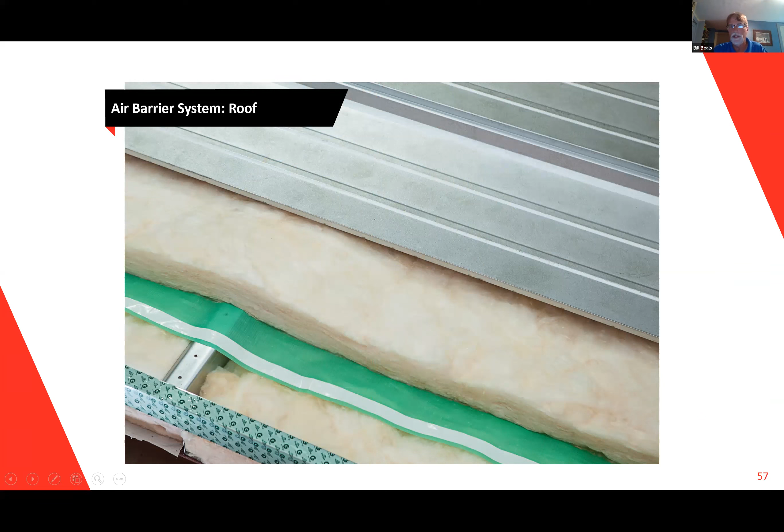And again, you look at a well-designed building, a well air barriered building with all these insulation levels, things can go wrong real fast. And standing seam roofs, although watertight and perform very well, they're not airtight. So if you built a building with no insulation whatsoever and you were going to blower door test it, you would realize your building could not get to pressure. So vapor barriers, fiberglass, air barriers, any combination thereof.

So vapor barriers have three classes: class 1, class 2, class 3. And we are seeing some changes on that, which the hygrothermal analysis through the MBMA is going to help us out on. Metal buildings, most of the perm ratings on the vapor barriers we use are about a 0.02, which is as good as it gets in any industry, because metal buildings are prone... they're not prone to condensation. All construction types are. Metal buildings just let you know real fast if you have a problem because there's nothing that will absorb the moisture.

Steel, fiberglass does not absorb moisture. It just contains itself within the fibers themselves and the airspace. It doesn't actually absorb, nor does steel. So your drips are going to happen pretty quickly.

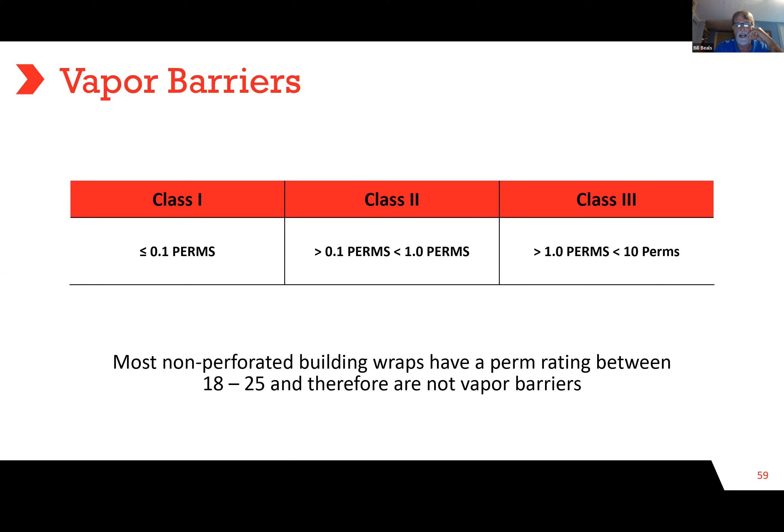So when you're using a vapor barrier as an air barrier, that's all fine, as long as it's sealed and everything's good. But if you're using something different as an air barrier, like we've done, then you've got to have what's called an air barrier, which has to be between 18 and 25 perms, which allows moisture, gas, air to pass through. So you're not trapping moisture within that assembly.

So I talked about some buildings that we have tested just to see where we were at as an industry. And these were quite a few years ago. And fortunately, these were done just outside Boston in December. So we had inside warm temperatures, outside very cold temperatures, which allowed the thermography option to work quite well.

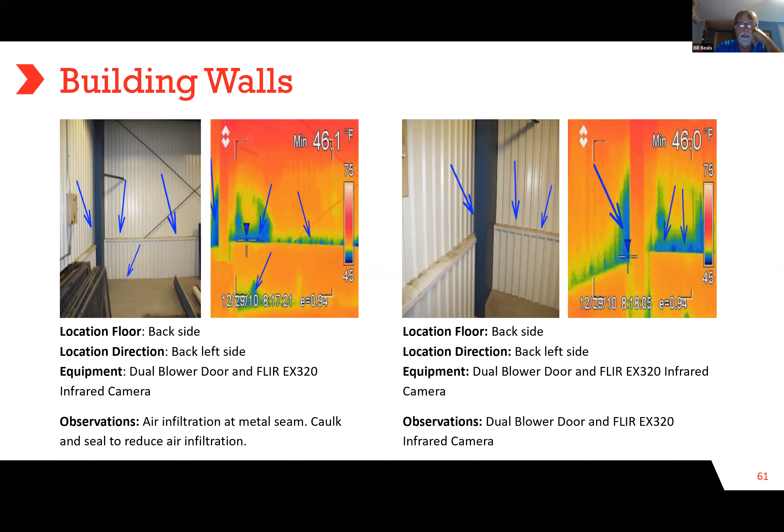Same over in this corner, especially around those frames, because all your insulation is either compressed or coming together with voids. These can basically be the fail of a blower door tested building, which this one actually did fail until they made some modifications. We were also able to bring it back to a pass.

So some of your other areas where you as a metal building guy build a building, do everything right, and the electrician comes in and tears all the insulation out behind the liner panel so he can get his electrical through and do his work, this is what happens.

Huge leakages around other trades that were unexpected. So most of these can be repaired, but again, if you fail, you have to go back to these areas and make corrective actions until you pass or get to the number that is now allowable.

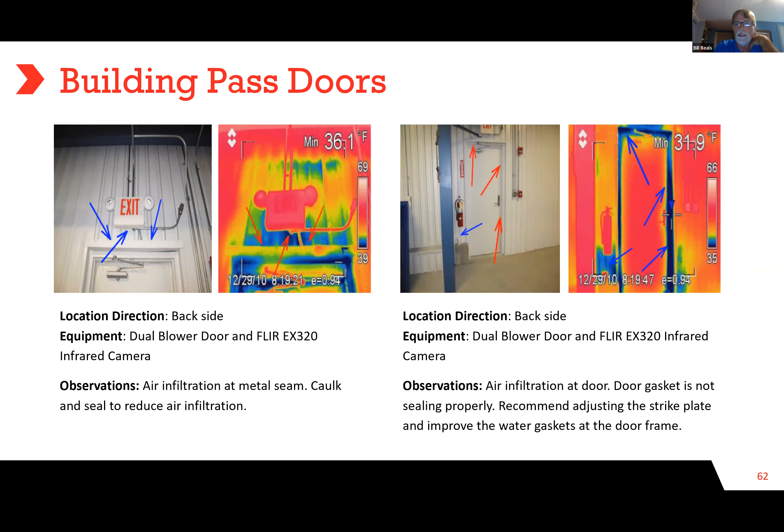Standard pass doors, I don't think it's any secret that you're going to have a lot of leakage around the doors and the frames themselves. That's why they have a table at which they must be tested. But even the tested doors, you're going to have leakage, but it's usually nowhere near enough to make a building fail. Even with 10 doors, there's not enough leakage there to make it kind of fail.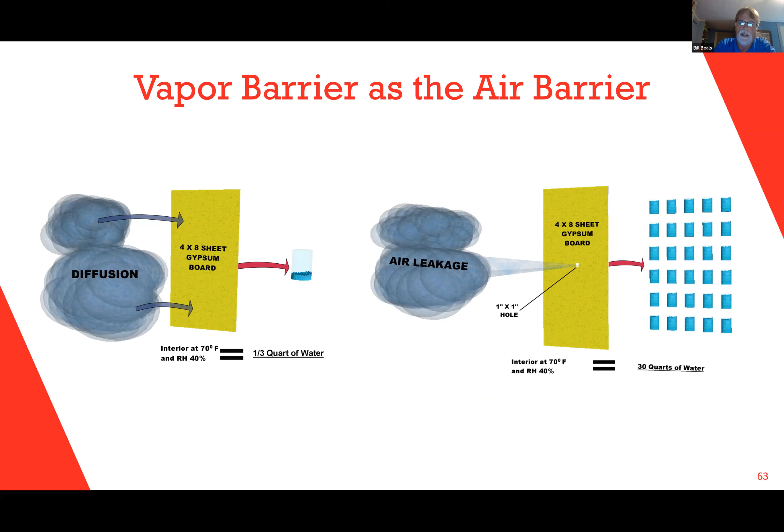So that's why I pointed out, as far as the air barrier goes and the vapor barrier goes, it's very important to make sure that all those seals are done, and those knife plates, the flange bracing, and everything that goes into the potential of poking a hole in these needs to be addressed.

So I'm not sure where we're at on time here. I think we're good. And I know we were going to hang around and answer some questions, so I'm going to send this screen back to Caitlin, I hope. And I don't have a movie staff here like Sam and his guys, so it's just me. That's a-okay. So I'm keeping an eye on this.

And I'd love to hear a little bit more about, can you talk a little bit more about the banded liner systems versus long tab banded systems? Yes. Particularly their differences. There are huge differences. So one of the biggest differences on a banded liner system, most of them offer what's called fall protection. And some have variations of that. Some are fall protected, some are not. Know the difference. Long tab banded systems are not fall protected in any way, nor have they ever been.

And the other problem that you'll have with a long tab banded system, or can be a problem, although most of the manufacturers have changed this detail, is the bridging that goes in between the purlins that keeps the purlins from rolling on one another. So with long tab banded, you have to go up over that bridging and up over that bridging, and it compromises, number one, the appearance, and it compromises the thermal performance.

But if you do what's called a top and bottom angle, TBA, that puts angle on the bottom of the purlins, angle on the top of the purlins, and eliminates this bridging that's in the purlin cavity. That's the way to do these and do them right. I have a lot of customers that do that the right way, and they look phenomenal. The advantages: the purlins are exposed for other trades, the thermal performances are there, but just understand the difference.